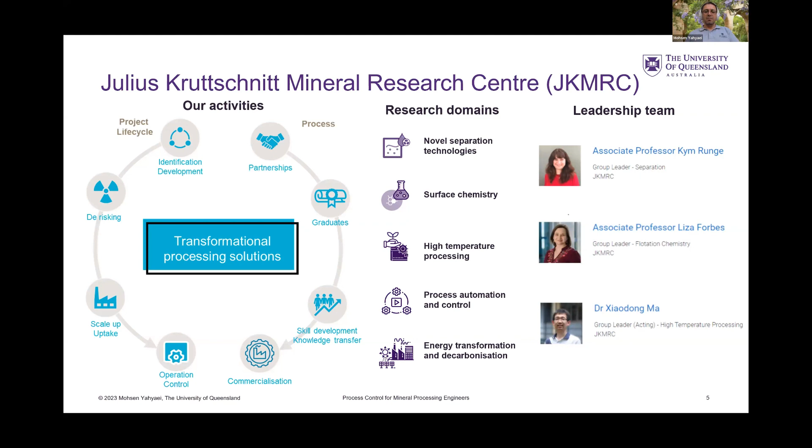I am privileged to work with a great leadership team in JKMRC. Associate Professor Kym Runge, who is the group leader for the separation group, Associate Professor Liza Forbes, who is looking after the flotation chemistry group, and Dr. Xiaodong Ma, who is a group leader in high temperature processing. Those are top experts in the field in the world, and they are running most of our research in those fields in JKMRC, and I have the privilege to work with them.

And to the same level of importance, we have our research students, who are some of the major drivers of those key areas where we have to develop the fundamentals to get to the point that we can develop solutions. And these are the cohort that form the future leaders of the industry through the experience and knowledge that they gain through the work that they do in JKMRC.

Also, every institute needs great support from the administration team, through the workshop and lab services that we have, as well as the administration services and safety aspects. And I think they play a key role in ensuring that our research is progressing very well. And I would like to acknowledge their contribution as well.

Okay, so I want you guys, we already have around 20 participants, to engage with this work, because when I'm presenting it as a webinar, it's very hard to interact with people. But using your mobile phone and scanning the QR code, you would be able to get to a questionnaire that I have, and I want you to engage with the questionnaire and help me with the question. So, sorry, I'm going to go back again quickly here.

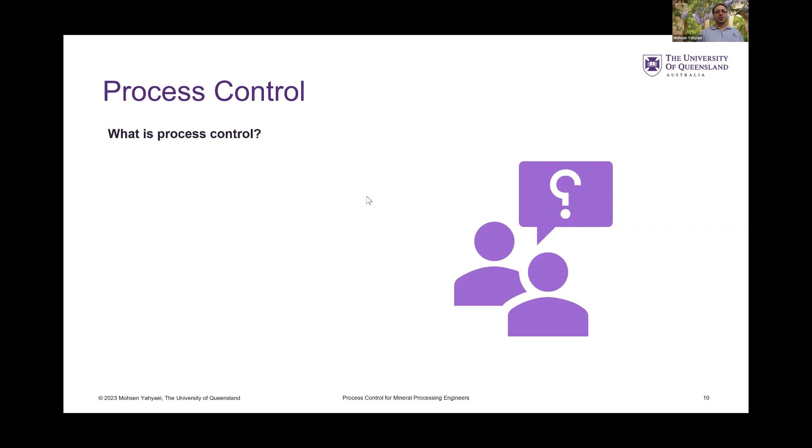The question that I have is, what is process control in your view? And there is no wrong or right answer. All I want you guys to do is to rank these based on the level of relevance that you see they have for process control. So you can simply use your mobile phone, scan the QR code, and I can see that there is already one participant there, and try to rank them from 1 to 4 based on the level of relevance they have to process control. So we can look into them.

I put 4 options there. Some people might think stabilization of the process is important. Some people might see monitoring and managing, prediction and optimization, or overarching optimization. So great, we can see results of 1 person. I'm hoping that we get at least 18 people joining that poll. Okay, good, very good outcomes. It seems that monitoring, managing, and adjusting the process is a winner so far.

We got 5 participants. Let's get more people. And this is anonymous, so make sure that you join. That gives us a bit of a view in terms of what you see as process control. And again, remember, there's no wrong or right answer. It's more about your view, how relevant each of them is to process control. You would see that all 4 of them are relevant, but for me, it's more about gauging how the audience sees the level of relevance of each of these aspects.

So I think, as I said, pretty much all of them are relevant, or they are aspects of process control. Whether it's the stabilization of the process to desired operating condition, which later you will see is the base layer that we want, and then monitoring and managing the process to ensure productivity as well as throughput, and then optimization of the system holistically.

Cool. So in terms of automation, I think there's a key aspect. I think most of you who are working in operations are aware that there's a strong push from our industry to get to advanced control and automation. I think the big driver behind that is the drive for producing products at a lower cost with high productivity, which is primarily driven by the increased emphasis we see nowadays on environmental, social, and governance aspects, in particular the energy transition as well as social performance.

And how automation delivers that value, I believe, is through efficient use of resources, improving product quality, enhancing safety and work conditions, and reducing losses. But the way you can achieve those values is through coherent and cohesive decision support that is backed by automation. And that's one of the key points I want people to pay attention to. Process control or process automation by itself is not going to deliver the value unless it is helping and supporting coherent and cohesive decision making.

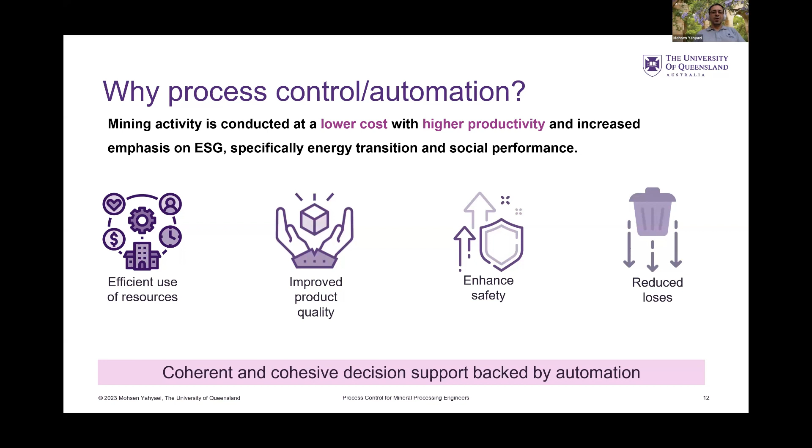And often the directions of the changes and optimization are not coherent across the whole process. And I think that's a key part: automation and control can deliver value through enabling that coherent and cohesive decision making, which is essentially the crux of the value.

When I'm talking, you see that I use two terms, process control and process automation. People often use them interchangeably. But there's a subtle difference between these two aspects, and that's primarily around the time span over which the control happens. So think about process control in the context of a mineral processing plant, which I presented here: a typical SAG mill, ball mill crushing circuit, commonly known as the SABC circuit, which is used widely in the industry.

Process control is essentially about collecting signals, passing them through the control room, and then using a basic level of control, which is stabilizing the process to a target, with decisions made by operators about where those targets should be, or often intervention of the operators to adjust the targets to get the process to that level of stability and performance.

But process automation is about moving that decision making more toward automation, which means that most of those decisions around the targets or set points, and the interaction between units, are made autonomously by algorithms that you have developed. The operators are more looking into setting targets, setting boundaries, and setting direction. That level of automation also looks into longer term intervals versus process control.

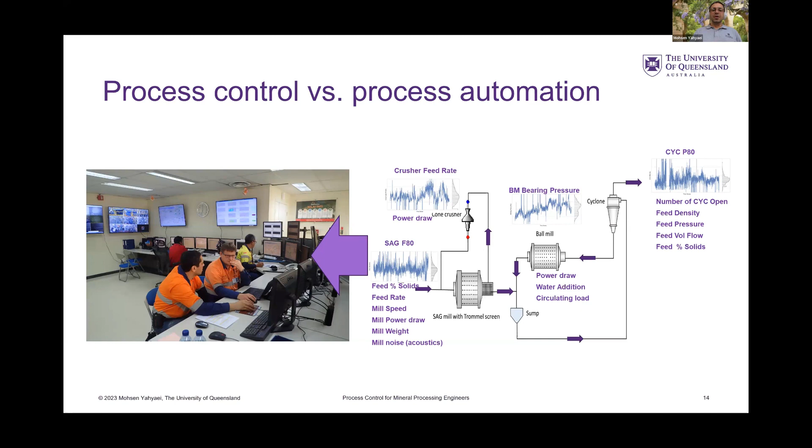Essentially, when they talk about control, sometimes they mean automation. And sometimes when they talk about automation, they mean control. So we have to be careful about that aspect. And obviously, we are dealing with not a few data. It's essentially a huge amount of data that you have to read, evaluate, and then assess, and then make that decision.

So in a typical operation, normally you have more people essentially on the ground next to the operations, operators that look at the results of the measurements and the data that comes from the process and make critical decisions. And usually the time span that they have is in the order of seconds and minutes. So they don't have much time.

So normally when you're sitting in a control room, you have a couple of minutes and often a few seconds to make a critical decision in terms of, should I turn on a pump or turn off the pump? Or should I increase this set point, or should I decrease it? So those are the things that you have to do. As you go higher up the chain, you've got more time to make those critical decisions.

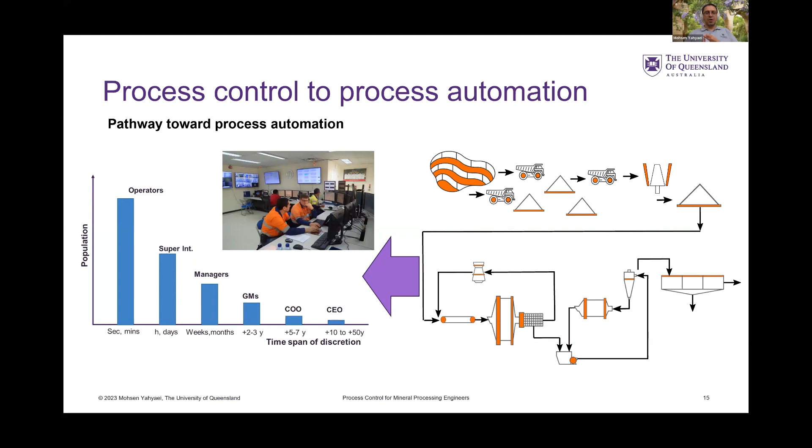And they have a significant impact on the bottom line of the company, but it takes a while for those to be seen at the higher level. So we think that through automation of this process, we can improve them.

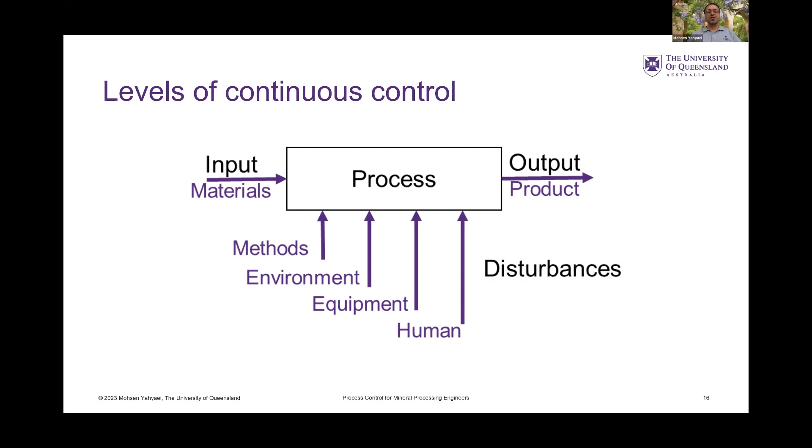So when I'm talking about control, the first thing that we have to bear in mind is that control has levels as well. At the basic level, what we want to do with control is stabilize our process to achieve a target. The target could be a desired product, or a certain outcome from the process, in light of the variation that happens, which I categorize into 4 groups: variation that relates to methods, to the environment, to equipment, and to human preferences, which tends to create fluctuation in the process and take it out of stability.

So the example of the SAG mill is a great one. I take that because most of my time I've worked with SAG mills and I love them a lot. So I use that example here. Although there are many people that want to retire these SAG mills, I don't think they're going to do it any time soon.

So essentially, when you look at the SAG mill as a process, you've got the ore and water coming as an input into the SAG mill. You are looking into your product quality, the throughput that you can get from that SAG mill, the load, and also the power draw as a result of the operation of the SAG mill. In light of that, there might be parameters that have an effect on the SAG mill and might make it fluctuate.

We know that ore has variable properties. The fluctuation in upstream units is going to have an effect on your mill. The equipment itself, because of wear, for instance, the liner profile is changing, the grate aperture size is changing, and that actually changes the behavior of the mill.

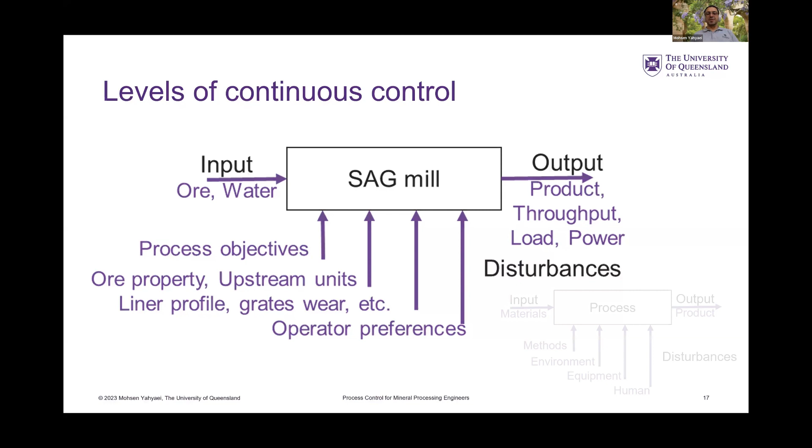And also because these devices are controlled by human beings, the operator preferences are also one of those aspects that keep changing those processes. So when we design stabilizing control, essentially we have a system in the background that measures some of the critical parameters of the process, checks those against the targets that are often set by the operator, and then generates control action that manipulates some of the parameters in the process to ensure that the process

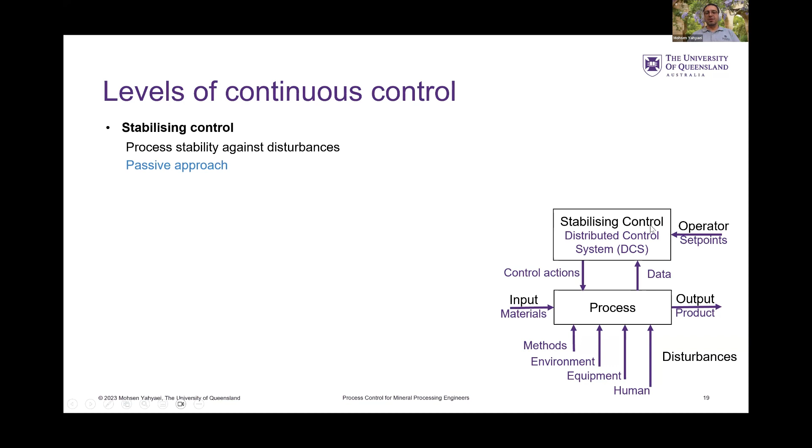is stable. But the nature of stabilizing process control is a passive approach. Essentially, unless there is a deviation from the set point, the process control is not going to take any action. So that is done through often localized set points for each process. And the set points are often used for achieving a target performance or ensuring the safety aspects, like for instance, if the equipment works under pressure, it's within that target, there is no spillage happening, or also managing the environmental aspects.

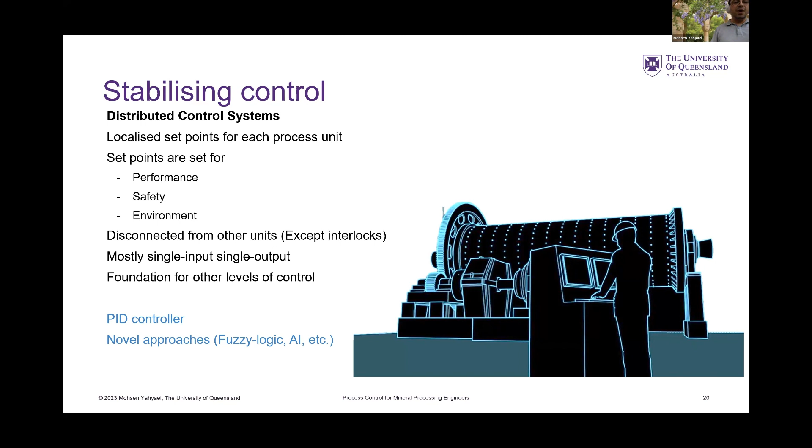Usually those stabilizing controls are disconnected from other units, except when there is an interlock between units. And usually they are single input and single output. But they are the foundation for other levels of the control. Without them, we can't achieve the other levels. The prime example for stabilizing control is the PID controller, proportional, integral, and derivative controller. But there are other novel approaches like fuzzy logic and AI as well that might help.

So the other level is, one of the aspects that I want to say in terms of how we can move from process control, which is stabilizing, to automation. When you implement process control, that brings precision and repeatability. Because one of the key aspects of the control is when you set your system, they are precise. Essentially, they react and respond to the changes the same way every single time. And that's the beauty of process control. It brings precision and repeatability.

And what we think is, because automation or process control can bring precision and repeatability, we can reduce uncertainty and start driving a pathway toward using automated algorithms and machines to make those decisions. And that's where supervisory control or model predictive control can perform very well. So essentially, once you've established your stabilizing control as your base layer or the foundation of your advanced control, then you can implement supervisory control that uses the prediction of the process, identifies the key aspects that are going to change in the process, and can then drive the stabilizing control toward new targets.

And this is quite an active approach. Essentially, it predicts the process status and set points, and then uses an active approach to control the process. And through that, we use model predictive control, or a term that we coined, model-informed process control, which means that the models are not heavily involved in controlling, but they inform operators in making decisions when your models are not as well structured or are not very trusted.

Still, they are looking at separate units and use the information for that, but they can provide an overview of the process as well. And they normally incorporate upstream and downstream as a way of adding constraints. The models that you use could be semi-fundamental models or even fundamental models if they exist. And another approach is the data-driven approach, sometimes using artificial neural networks or other machine learning techniques that heavily rely on the data. So those are the techniques commonly used in the industry.

The last level, which is moving toward a more advanced level, is about optimization. Essentially, what we put as one of the options there is not only focusing on units individually and trying to control them, but also focusing on holistic optimization, which means that you bring constraints from the process and then pose those constraints either directly to your stabilizing control through targets that you add, or impose them on your MPC, model predictive control, for making decisions at the supervisory control level. So that's something that you can organize and do.

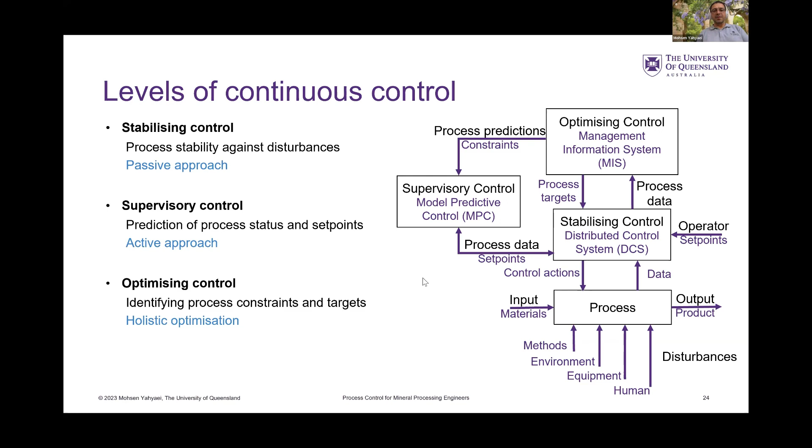That's essentially the process. And the optimization control, essentially what it does, it moves from centralized unit-based toward enterprise control. So you are not only focusing on unit processes in your processing plant, but also you are thinking about the constraints that might exist in mining, or the targets that you might have in your shipping, or the requirements that it has in your smelting.

And then you can actually look at the overview of the value chain, set the holistic KPIs that can translate between all of the units, and then use those KPIs to set constraints and targets for different operating units, and through that you can trickle it down to even processing units that they can look at.

So when you do that aspects of automation, that can change the landscape, and it can help you to start moving from process control to process automation. What does it mean? It means when you start implementing control, through the precision and repeatability that it brings, it's going to reduce the uncertainty. And that means that you can start having models and tools that can perform very well when the uncertainty is very low.

That means that now I can start automating the bulk of the decisions made in the short time span of discretion, in order of seconds and minutes. And that can change the landscape of the population of the people that make critical decisions in your operation. And as you can see, this is my view in terms of when you implement automation, how it's going to change.

So you're going to have a group of people, which could be your operators, that are moving from that level of decision making to this level, which I call constraint management. They use the human intuition in the areas that have more complexity, which requires knowledge and expertise. That's where humans have more skills. So to understand the constraints of the process, and by managing those constraints, let the automated system achieve its maximum potential for automated decision making.

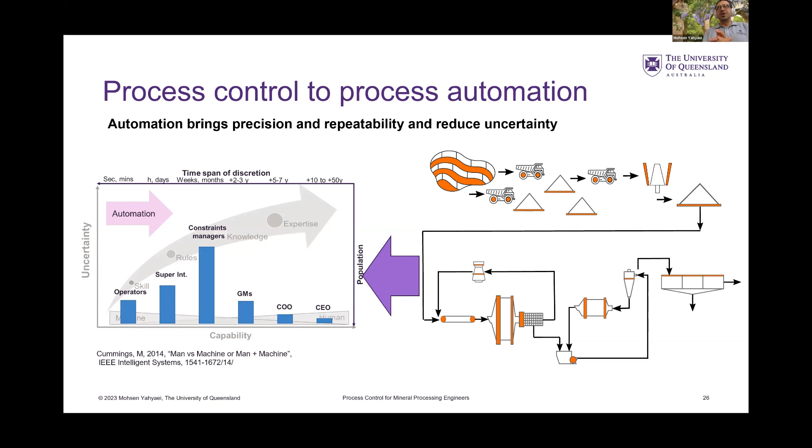But then you can use humans where they are much better, as the experts, identifying constraints by analyzing aspects across the whole process. They're going to have more time in that time span of discretion to make those decisions: reallocation of resources, setting new targets, identifying potential constraints and start releasing them, which then helps the automated system to work with much less limitations.

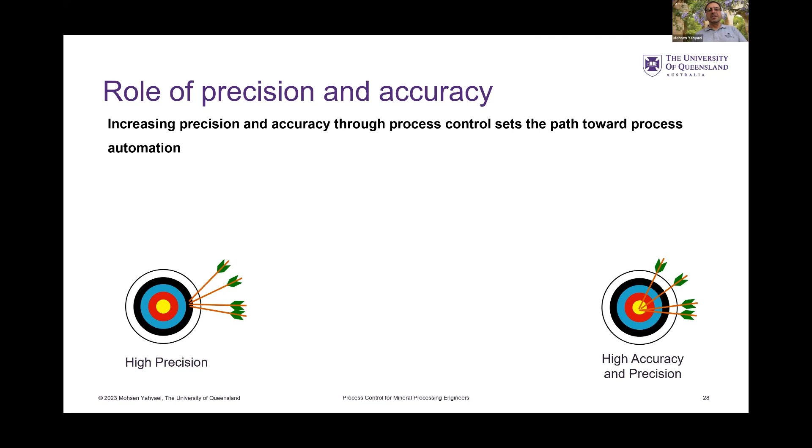But as you heard, that heavily relies on the automated system to be precise, but at the same time, it has to be accurate as well. And that I think is one of those major challenges. If your process is not accurate, even if it's precise, it's going to be a problem. And there is a picture for that.

Most of the automated systems or controls that you apply are inherently precise, but not all of them are accurate. And if you have experience, you would see that in many operations, when they start implementing new control systems, it is a bit of an effort either beforehand, during implementation, or even after implementation, to keep updating it and make it more and more accurate.

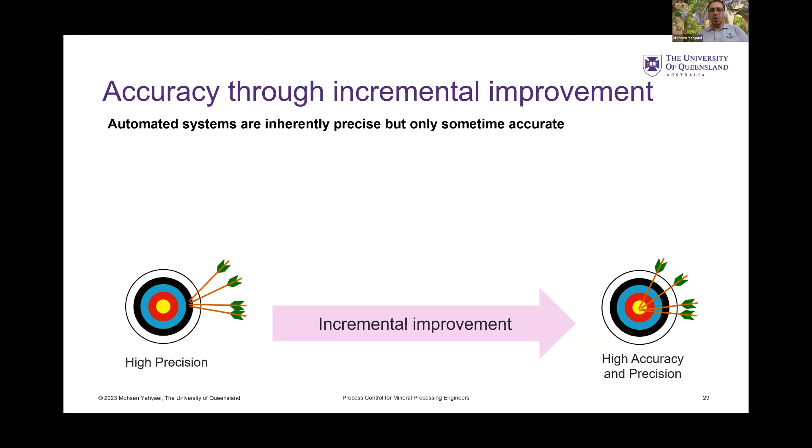Why accuracy is important, and how the accuracy is going to be achieved, I would put it in this form: if you look inside an automated system and ask how it works, I divided it into two forms, which I borrowed from my colleague, Professor Ross McAree.

I really liked this system. So when you think of an automated system, the automated system actually has a part which is called the sensorium. The sensorium gets input from the environment to generate what we call situational awareness. And that situational awareness, with the targets, feeds into a decision planner to create commands that then convert into action to the process.

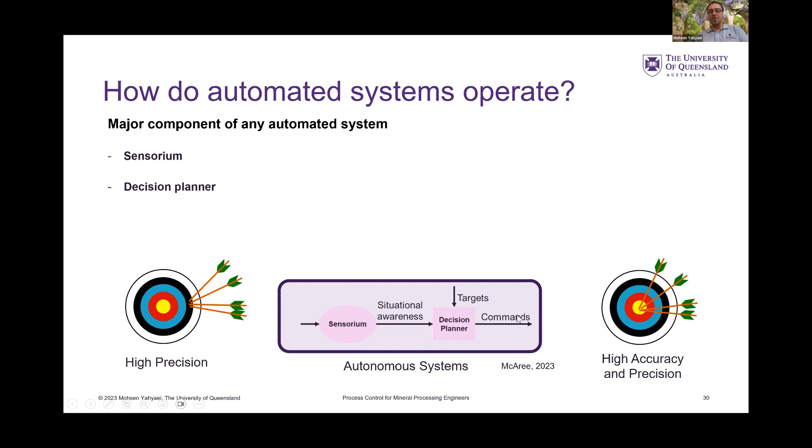So why does that process become important in terms of being accurate? This is a book that I really encourage everybody to read if you haven't done it. It's freely available on the internet, so you can just scan the QR code and get access to the book. What the book gives you, which I liked a lot, is an evaluation of how we as human beings judge machines when they make decisions.

And when I read that book, I realized why accuracy in our automated systems becomes important, and why many of the automated systems that we have in industry are not working at their full potential. That all comes down to the issue of trust. And the bulk of trust relies on accuracy and precision. Precision is an inherent property of a control system, but accuracy is not.

When I read this book, I realized that human beings are willing to give control to machines or algorithms when the accuracy of the decisions made by those systems is, to a great extent, higher than a human's making the same decision. So if you provide information to a machine and a human to make the decision, the human is going to trust the machine more when the accuracy of the machine's decision is higher. And in many of the cases they reviewed, it was around 60% more accurate.

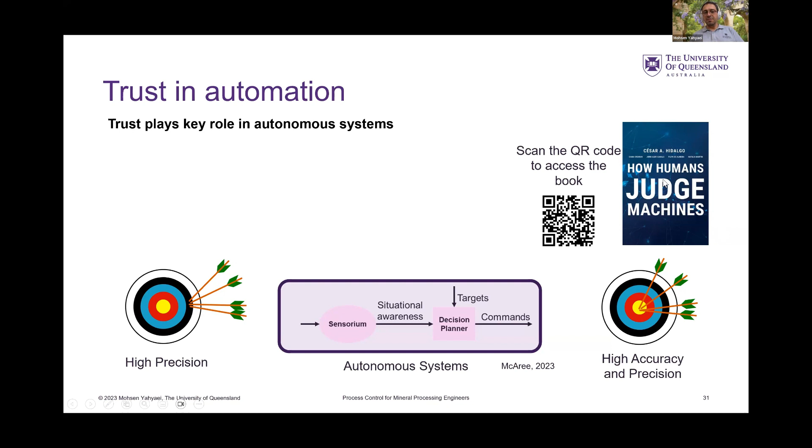It means that the system has to make 60% fewer mistakes compared to a human to be trusted by us. And the accuracy of the information and the accuracy of the decision that is made, which relies on accuracy of information, is the biggest driver that we need to have.

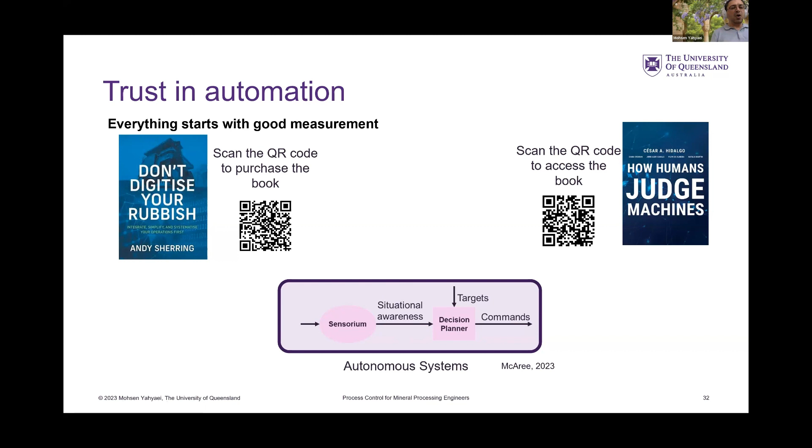And to me, everything starts with good measurements. That's a key part. Remember again the whole autonomous system. When you make decisions in your decision planner, one of the key inputs is your situational awareness. Having wrong data and information is the key part in making wrong decisions. So a trustable system starts with measurements that provide you with information that can help you get that level of accuracy in your decision.

Obviously, you need good decision planners as well. With good data and wrong decision planning, you're not going to achieve the accuracy. But in my view, it's much easier to develop those decision planners through understanding of the process that we have. But when the data are wrong, it's very hard. So we should focus on that a lot.

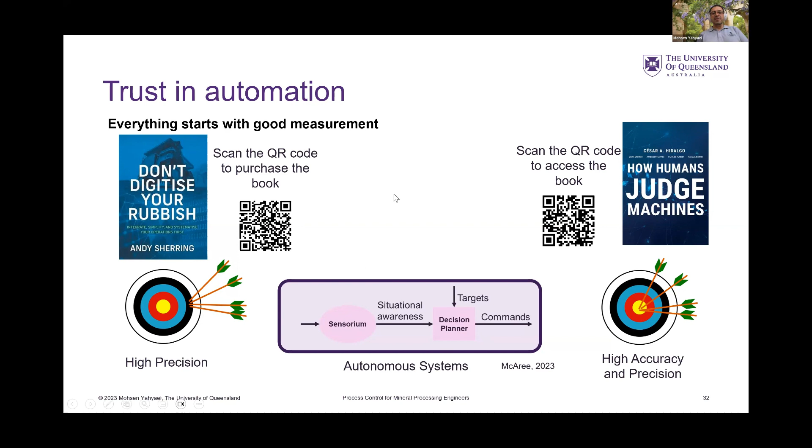So let's do another poll and look into how everybody thinks. How much trust do you have in the sensors you have in your operation? I'll just divide them roughly; I don't need very accurate data. If you very much trust the sensors you use in your operation, put more than 90. If you trust them a little bit, 70 to 90; less, 50 to 70. If you don't trust them that much, put less than 50%. And you might not work in operation, that's fine. You can say that you don't work in operation, but still participate.

Okay, at least we got some people that have more than 90%. That's very good to see that they have trust. Cool. I think this is very important for me. Make sure that you participate as much as you can. We've got around 25 people, so it would be good to get more participation.

But it seems that 70 to 90 is the winner. So we have a level of trust, but it's not very high. It's still good to see some people think they have sensors they can trust more than 90%. And I can see there are operations that don't have that level of trust in their process. But it's good that nobody thinks it's less than 50. Good. But that's a key part. As you can see, when you have 70 to 90% trust, that means there are times those sensors are not providing you with the right information, and that then feeds through your decision making.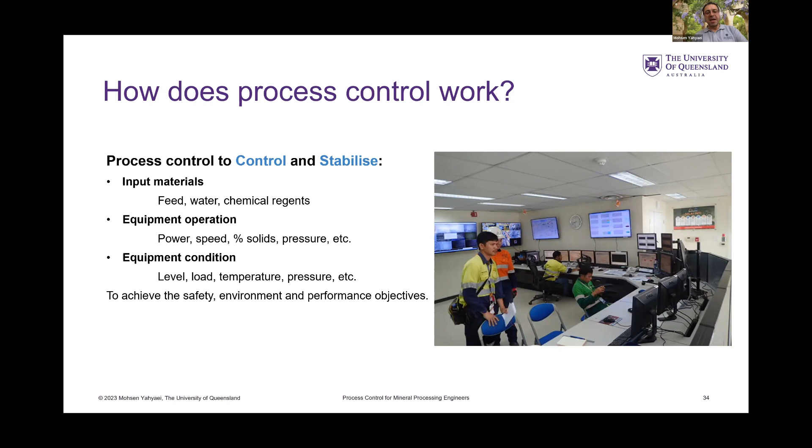And therefore, we need a great extent of confidence in the data that we have to be able to trust it. And we know that the control system uses control to stabilize the process, which relies on stability of the input, stability of the equipment, or stability of the equipment condition. So the decision made for any of these aspects has to be based on correct data sets.

And for making those decisions, we've got many aspects of the process control system that we have to rely on. They have to work okay to make sure that you get reasonable results and reasonable actions. That starts with instrumentation, the sensors, the measurements that we have, and then your final control element: when you set an action, whether that actuator actually got to the point that you wanted. And then obviously the decision planner inside, which is your control logic behind the back, also has to

be reliable. If it's in a stabilizing structure, then the PID controller or any type of controller for stabilization that we use has to be well tuned. And if it's not, then it's going to be a problem. And then you've got a whole support system around it, like programmable logic controllers and distributed control systems, to ensure that all of these units are coordinated, interacting, and working together. And that has to be functional as well.

So there's quite a bit of work that needs to be done, and that's, I think, one of the key points, especially at the stabilizing control level. Because, as I presented earlier on, the other levels of control heavily rely on that stabilizing control. And if you don't have the base stabilizing control working, then even if you have the most advanced models as your MPC, without that stabilizing control, you're not going to get there.

So for us as a research entity, we have been focusing on that problem for a long time. And we are developing research that I would like to explain over the next couple of slides: how we want to leverage that capability to help improve reliability of the data, ensure the quality of the data, and start providing that insight for the control system.

So one of these works is a great work that one of our PhD students, Niranjan Adhikari, has done. He also presented this work at the SAG conference in Canada a few weeks back. He has been working on how we can fuse the models, the domain expertise, and the power of data analytics together to be able to assess the data generated by operations and identify them in the form of operating regimes.

And this is a prototype of a dashboard that he created based on his work. By looking at 1 year's worth of production data from 2 operations, he worked with experts, started isolating the data, identifying different operating regimes, clustered the data into those operating regimes, then sense-checked them with domain experts to make sure those clusters are meaningful. Then he used that clustering algorithm, trained through fresh data, which can identify things like whether the operation is at steady state or not, whether it's facing a hardness constraint, or whether it's facing overloading issues.

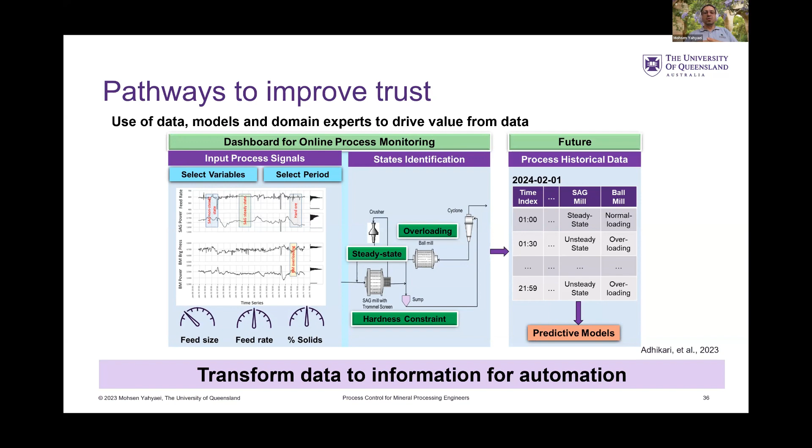And the beauty of that actually is now every time series data that you have, you can actually start stamping them with conditions, or in the near future, which we are working on, also with the confidence on the data that you have. And that essentially creates a pathway for us to be able to automate most of the transformation of the data to useful information.

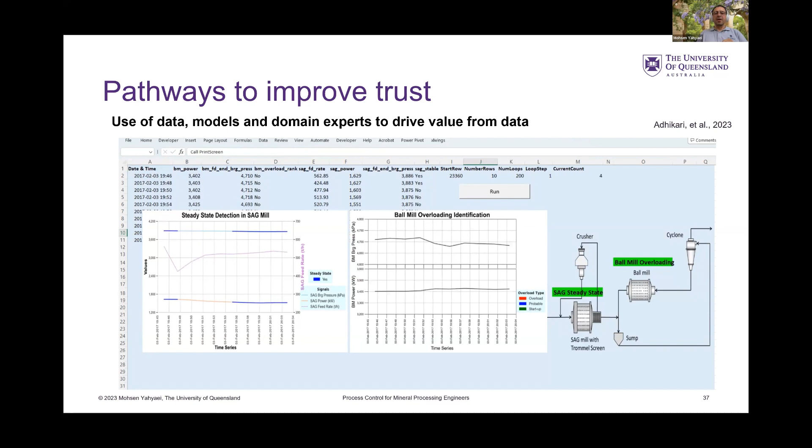And this is the view that we have: once that is established, in an operation you might be able to start adding labels like these ones, so that as the data is generated, the trained algorithm behind it starts using that to identify these situations in terms of what's happening in different states. To me, it's a great way of visualizing the end results of what we are developing at the moment.

The other one that we have been working on, and if you have been listening to my talks, you're probably by now sick of me talking about soft sensors. Soft sensors have a great opportunity to leverage the knowledge that we have developed from processes to reuse the huge amount of data that is generated by operations and turn them into useful information. Our approach in JK was, we are happy if lots of hard sensors are introduced as well, but we are already generating a huge amount of data.

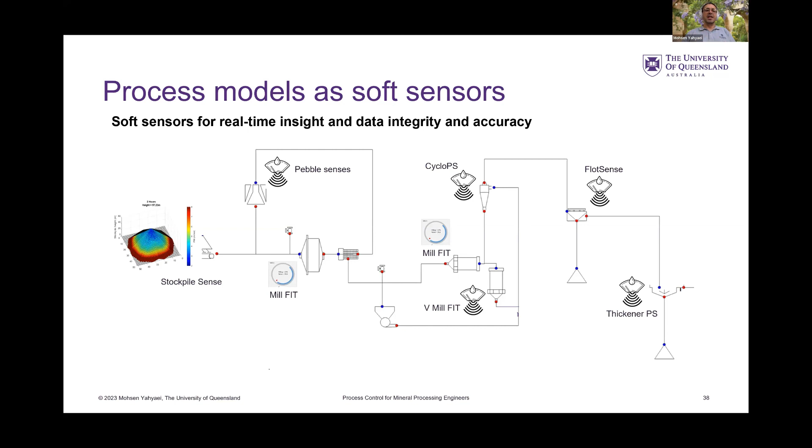Let's use them. We essentially developed a suite of soft sensors, and we are very proud of JK MillFit. Now we have JK CycloPS as well. We have a Stockpile Sense, and we have a VMillFit that is developed as well, and soon we go to other areas as well.

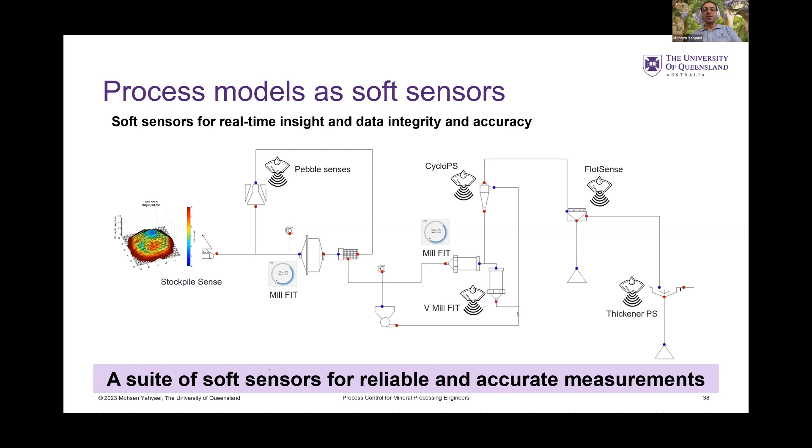The idea is they can be used not only to provide insight into the data that are more important for control, but there is also another value for those soft sensors. They can evaluate the data integrity and the accuracy of the measurement through sensor fusion. That's a very valuable approach, because remember I said the data is the main input. So how would you make sure of the integrity and the accuracy of your data? Soft sensors are one of those pathways. They can help you identify that.

JK MillFit is one that I'm very proud of. It's a soft sensor that we have developed. It comes in any platform that customers require. We don't sell a platform. We can put it in an Excel file, code it into their DCS, code it as an executable, or put it in any other platform of choice. It was already installed in 22 installations as of August, and we have 6 more since then. 18 SAG mills, 2 AG mills, and 2 ball mills are already done.

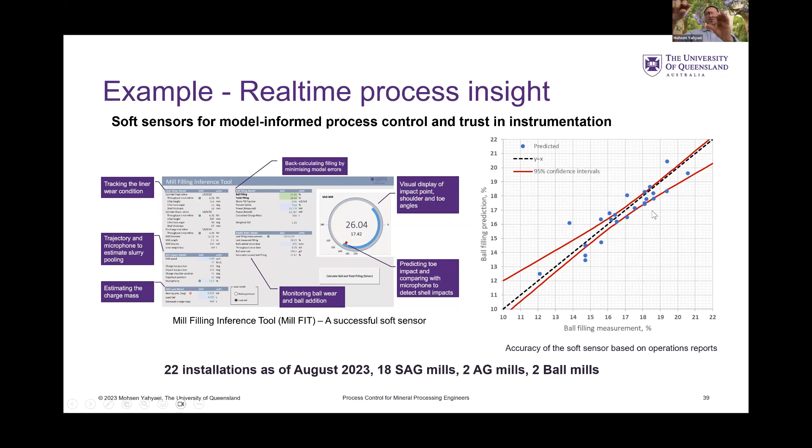Recently we have been privileged to work with one of the operations, and I'm really grateful to them for trusting us and giving us that opportunity. We developed a soft sensor for cyclones. We call it CycloPS. It gives you a real-time view of what's happening in your cyclone around the circulating load, by size, and the P80 of the cyclone. It can also provide an indication of roping.

One value of this sensor, when I was talking with my colleague Marko Hilden, who is the brain behind this work: when we looked at the site, there were occasions when they didn't have the density or the flow rate because of sensor issues. But the soft sensor, once trained, was able to fill in those times as well. That's another value of soft sensors: we can fill in sensor data when sensors are off calibration or not working, which is very useful. And we also have a vertical mill fit, VMillFit, that we are developing, which helps us understand the product size and circulating load.

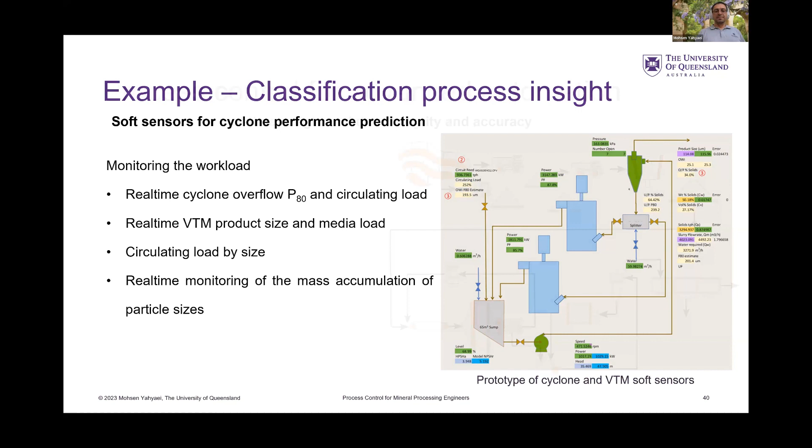And that's very valuable for real-time monitoring, especially around regrind processes. The cyclone actually can be done for primary cyclones or secondary cyclones, doesn't matter. And the VertiMill, vertical mill, if you use it as a tertiary or regrind, we can use it as well. And those soft sensors actually are going to provide you more trust in your data. And I think they're going to pave the road toward that automation vision that I had.

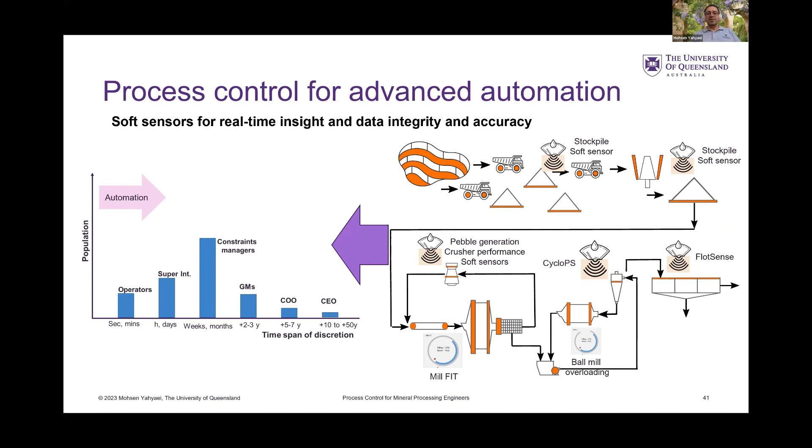And two more slides before I go for questions. One of them is that now we are looking into other areas as well, because nowadays you can see that these, what I call mobile sensors, are available on site. So many of the wearables, the sensors that are on robots, drones, can give you an overall view. Our thinking is where we can leverage these data as well, because with the help of mobile sensors, you can do measurements occasionally in areas where you might not be able to install a fixed sensor. And that actually is a good opportunity, and we're seeking some options there.

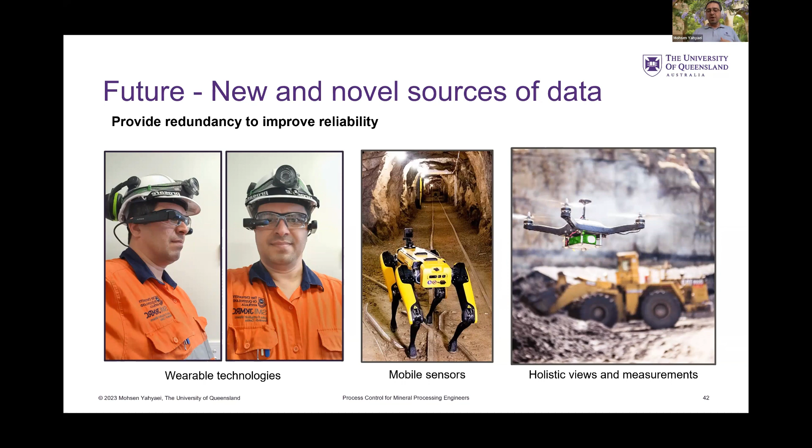And the other thing that we found is how you would visualize those complex data. And we think with the rise of these novel technologies like hologram tables or VR, AR, or 3D immersive technologies, we can find pathways to present the data, instead of in the form of graphs, in a way that can be understood by a human being. And I think that's another opportunity that we are looking at.